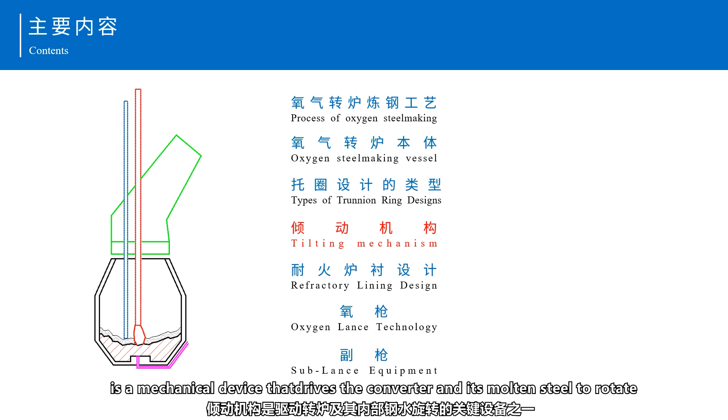Everyone, today I will introduce the tilting mechanism. The tilting mechanism of a converter is a mechanical device that drives the converter and its molten steel to rotate.

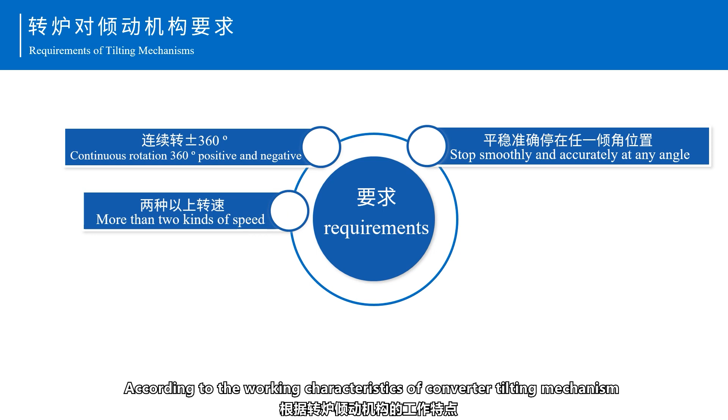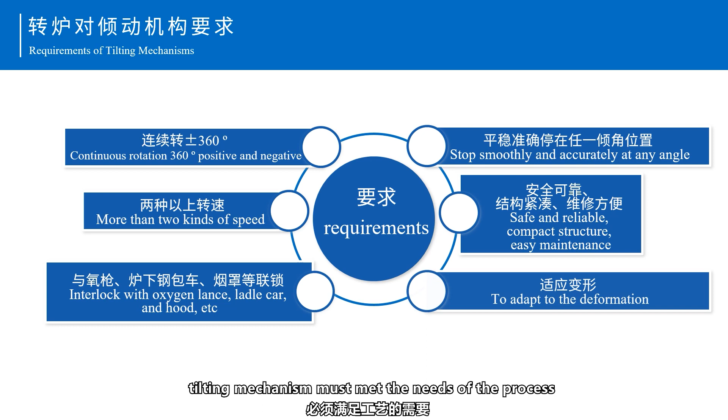According to the working characteristics of converter tilting mechanism and the need of operation technology, the tilting mechanism should meet the following requirements. First, in the whole production process, the tilting mechanism must meet the needs of the process.

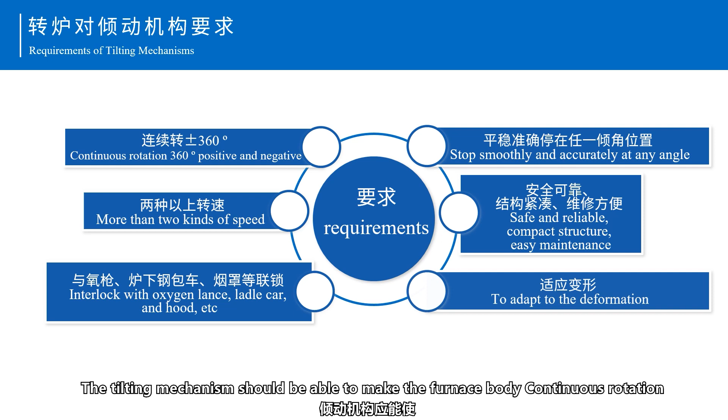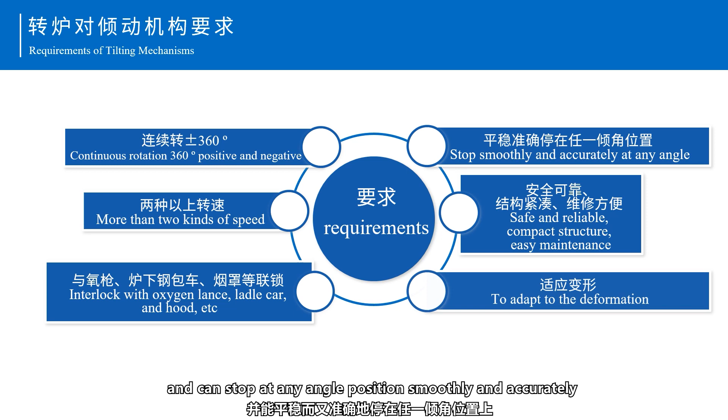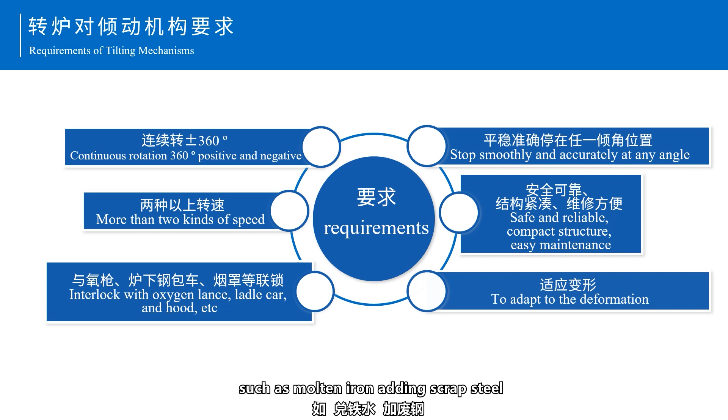The tilting mechanism should be able to make the furnace body continuously rotate for positive and negative 360 degrees and can stop at any angle position smoothly and accurately, so as to meet the requirements of various technological operations, such as molten iron, adding scrap steel, sampling, temperature measurement, steel drawing, pouring, and furnace repairing.

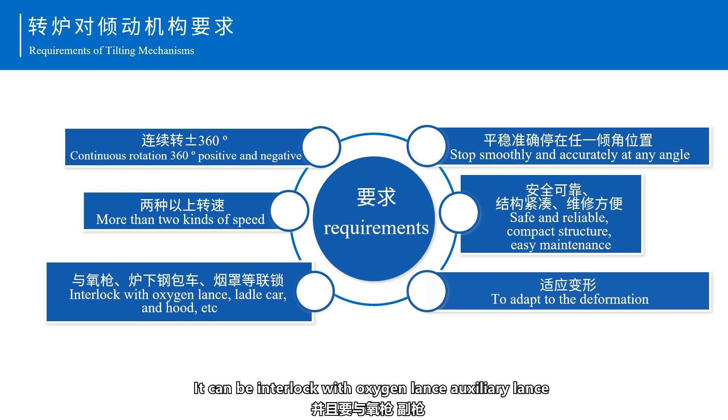It can be interlocked with oxygen lance, auxiliary lance, ladle car, smoke hood, and other equipment.

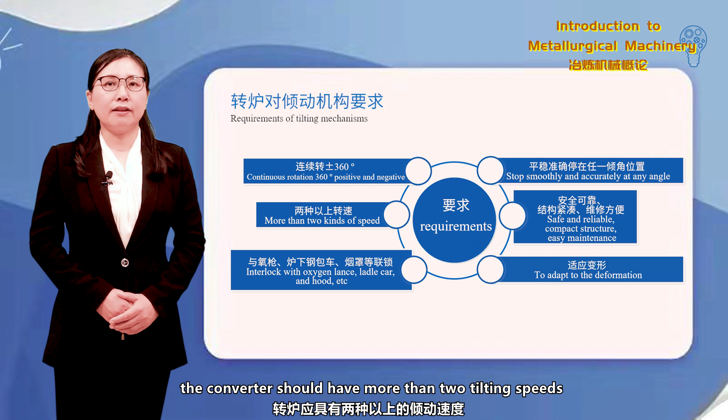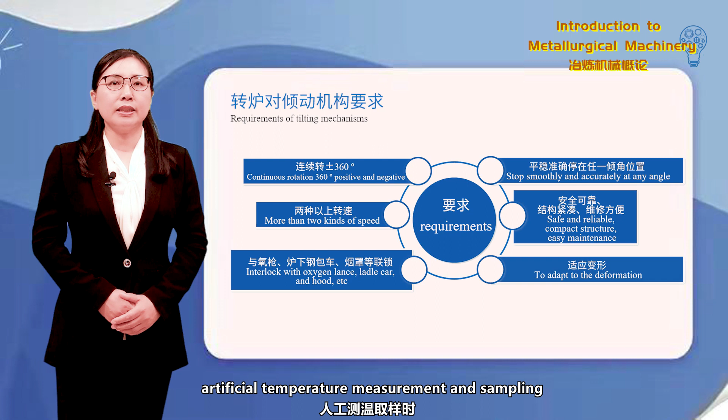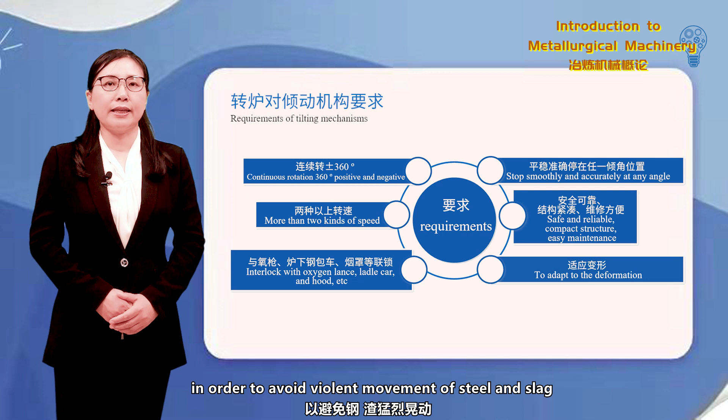Second, according to the requirements of the blowing process, the converter should have more than 2 tilting speeds. During steel tapping, slag pour out, artificial temperature measurement, and sampling, the BOF should tilt slowly and smoothly in order to avoid violent movement of steel and slag, or even splash out the mouth of furnace.

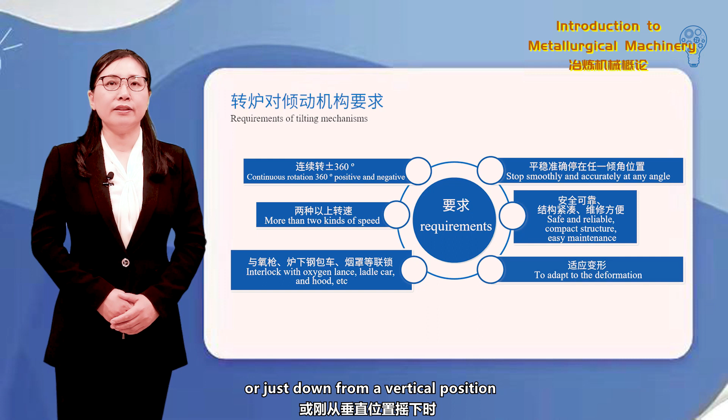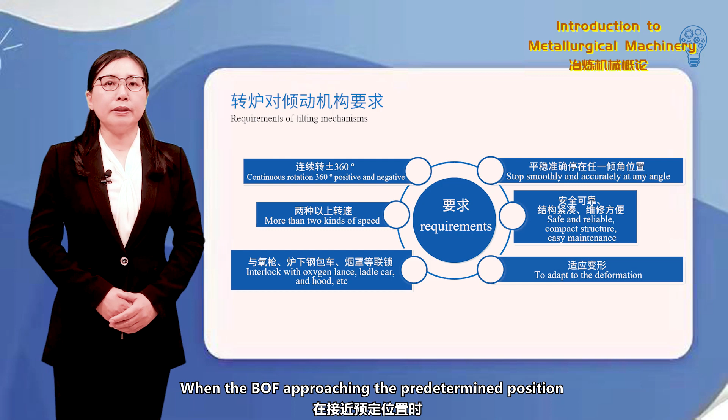When the converter is empty or shaken straight from a horizontal position or just down from a vertical position, a higher tilt speed can be used to reduce auxiliary time. When the BOF approaches the predetermined position, low-speed tilting is used to make the stop position accurate and make the furnace liquid stable.

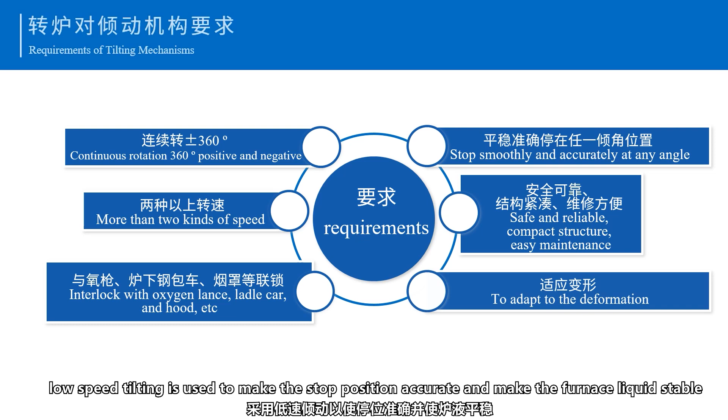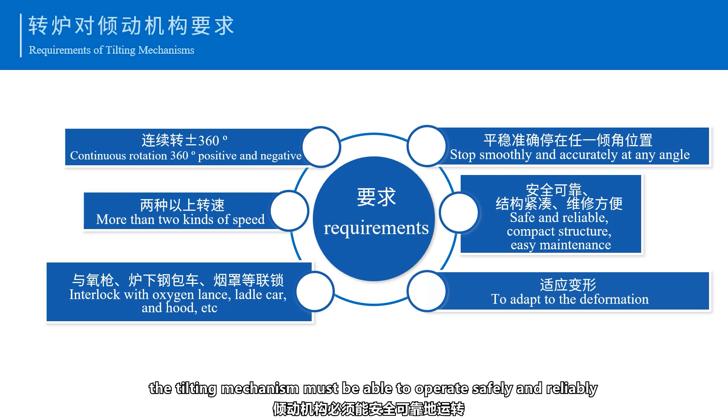Third, in the process of production, the tilting mechanism must be able to operate safely and reliably. Motor, gear, shaft, brake, and other equipment accidents shouldn't occur. Even if some equipment breaks down, there should be spare capacity to continue to work till the end of this furnace of steel.

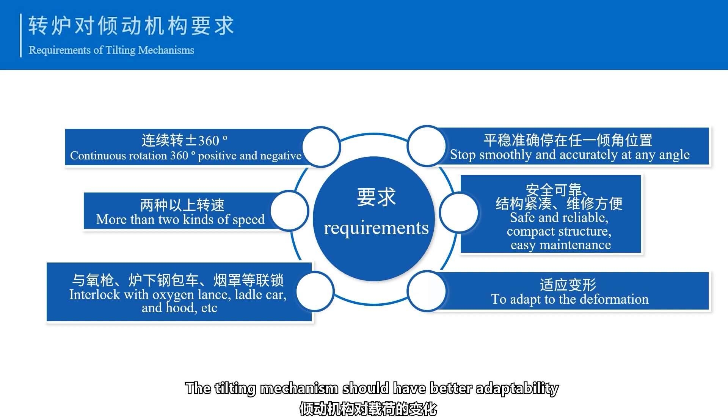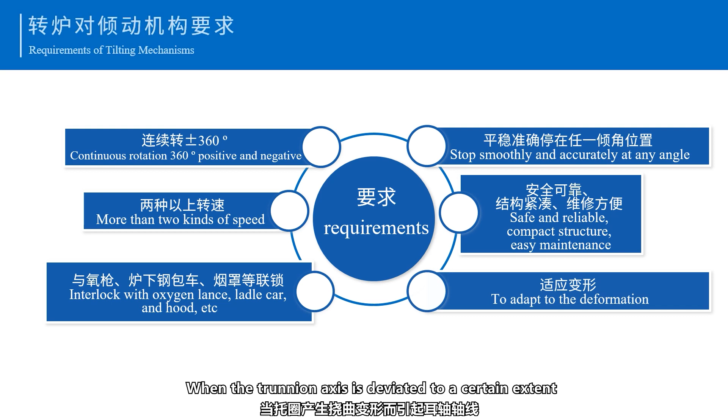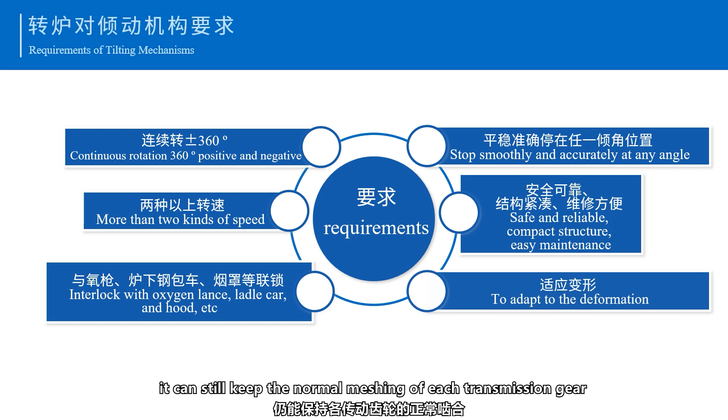Fourth, the tilting mechanism should have better adaptability to the change of load and the deformation of structure. When the trunnion axis is deviated to a certain extent due to the deflection of the bracket ring, it can still keep the normal meshing of each transmission gear, and at the same time, it should also have the performance of slowing down dynamic load and impact load.

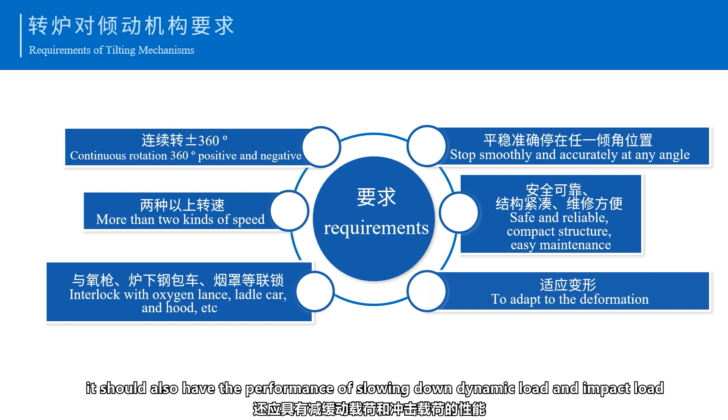Fifth, the structure of the tilting mechanism should be compact, lightweight, have high mechanical efficiency, and be easy to install and maintain.

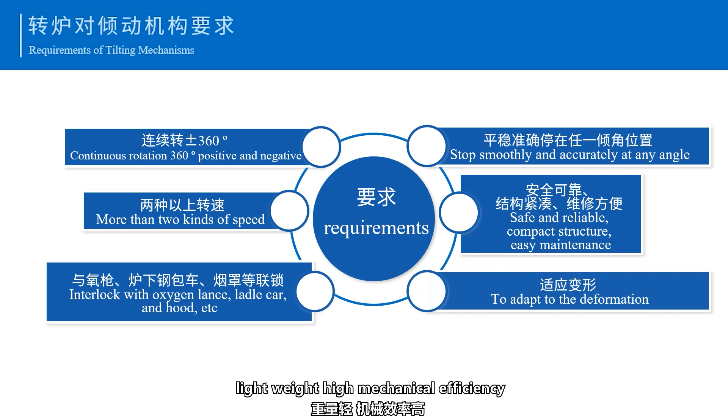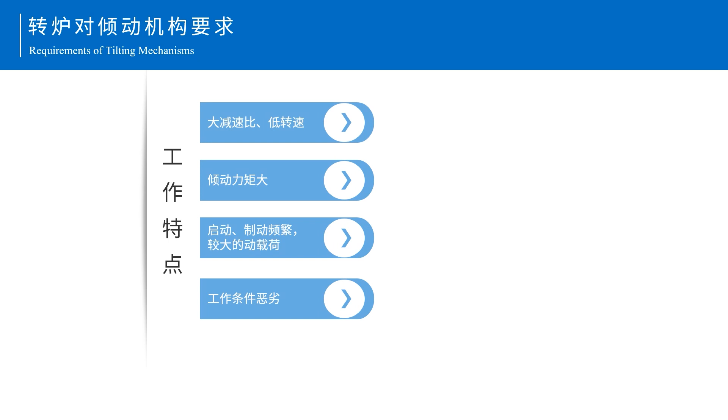There are many working characteristics of converter tilting mechanism. First, a large deceleration ratio. The working object of converter is a high temperature liquid metal.

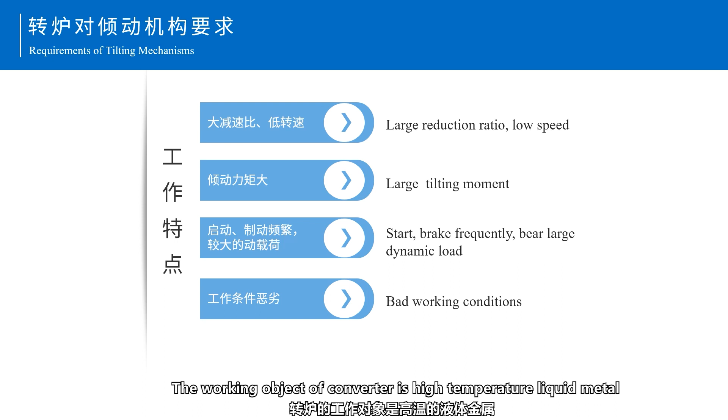There are a number of operations, such as steel tapping and adding molten iron. Therefore, the furnace takes a very low tilting speed, generally 0.1 to 1.5 revolutions per minute. To do this, the tilting mechanism must have a high deceleration ratio, usually 700 to 1000 or even thousands.

Second, the tilting moment is large. The weight of the converter body is very large, and the weight of the whole tilting part reaches hundreds or thousands of tons.

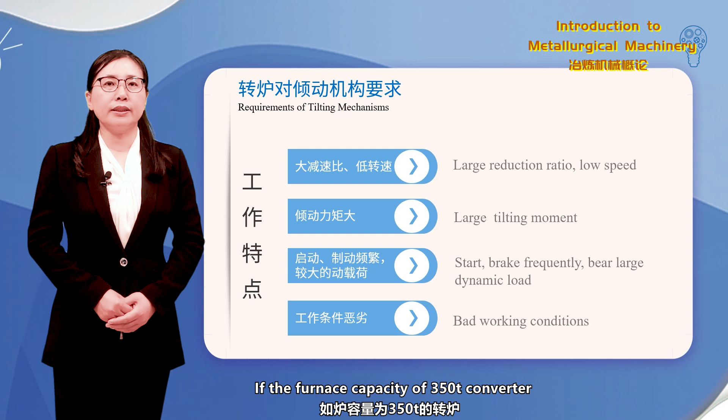If the capacity of the furnace is a 350 ton converter, its total weight is more than 1,450 tons. A great tilting moment is needed to tilt a converter of this weight.

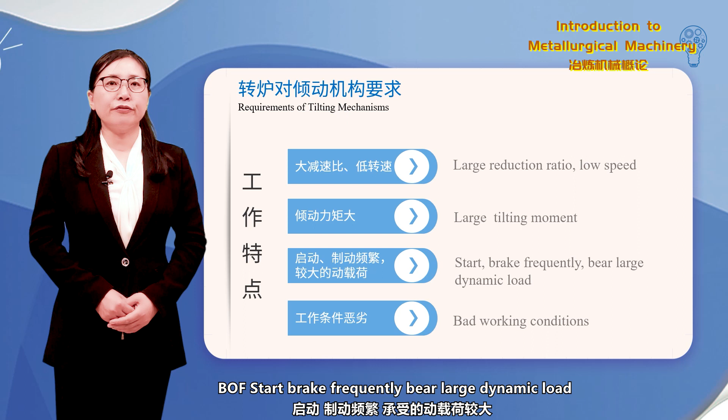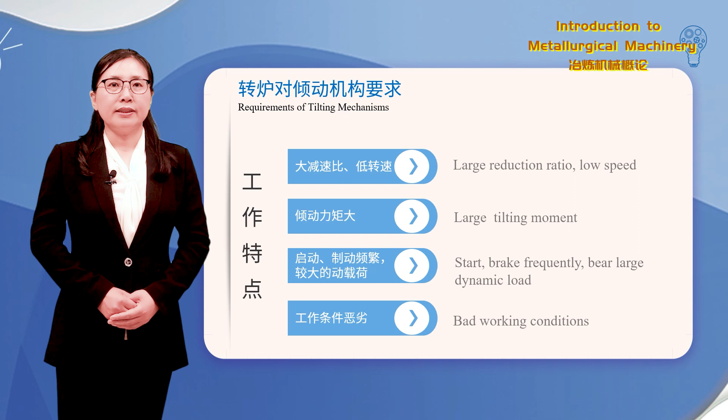Third, the BOF starts and brakes frequently with large dynamic load. The shortest smelting cycle of the converter is about 14 minutes. In this smelting cycle, a series of operations, such as adding scrap, adding molten iron, sampling, temperature measurement, steel tapping, slag pour out, and furnace repair, are involved in the starting and braking of the converter.

If the content of silicon and phosphorus in raw materials is high, the number of slag pour outs increases in the process of blowing, and the starting and braking operation is more frequent. In addition, the tilting mechanism not only bears the basic static load, but also bears the dynamic load caused by starting and braking. The dynamic load is more than twice the static load in the scraping operation.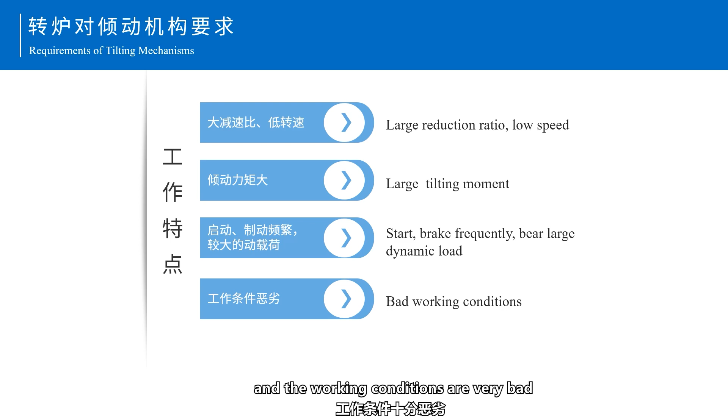Tilting mechanism works in the environment of high temperature and slag dust, and the working conditions are very bad. With the development of oxygen converter steelmaking production, the tilting mechanism has been constantly developed and improved, and various types of tilting mechanism have appeared.

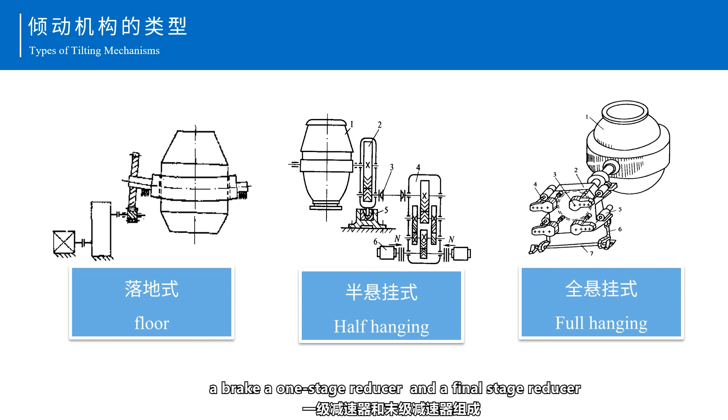The tilting mechanism is generally composed of a motor, a brake, a one-stage reducer, and a final stage reducer.

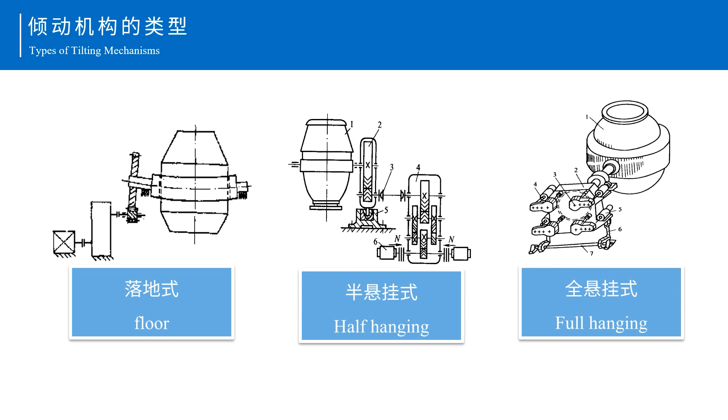The installation position of the transmission equipment is divided into floor type, semi-suspension type, full suspension type, and hydraulic type. Floor tilting mechanism means that the converter trunnion is equipped with a big gear, and all other transmission parts are installed on another foundation.

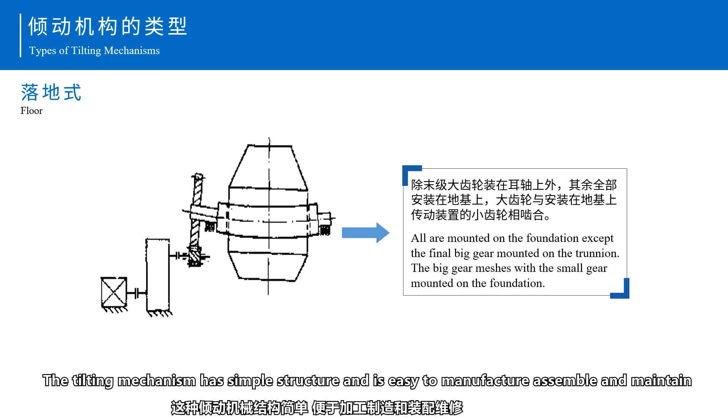The tilting mechanism has simple structure and is easy to manufacture, assemble, and maintain. When the trunnion bearing is worn, the big gear sinks or the trunnion tips upward due to the deformation of the bracket ring. The normal transmission of the big and small gears will then be impossible.

In addition, the big gear is an open gear, so sand easily falls in. Wear is serious, and life is short.

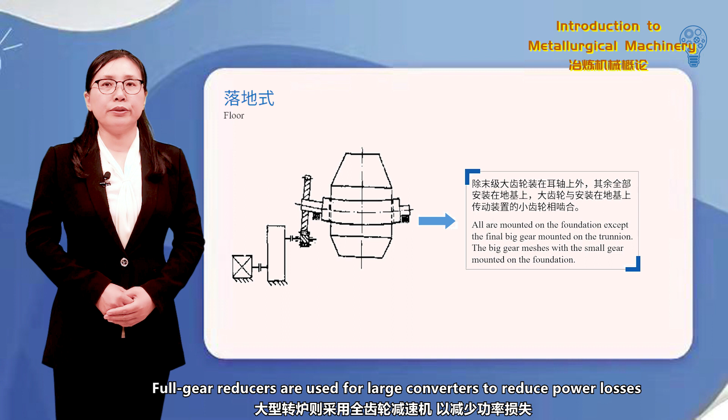Full gear reducers are used for large converters to reduce power losses. In order to overcome the disadvantage of fast wear of the low-speed open gear, the open gear is put into the box and becomes the main reducer.

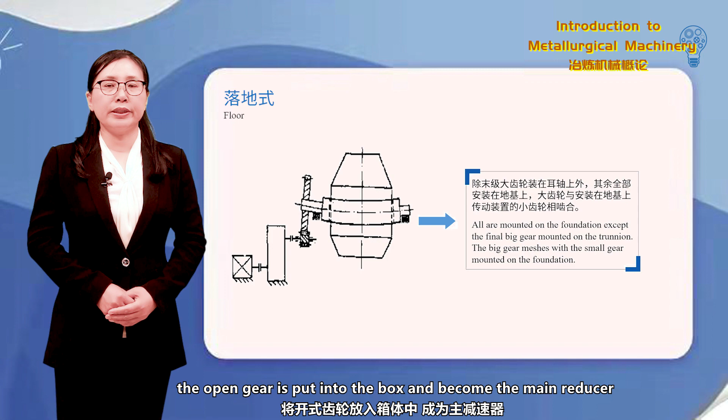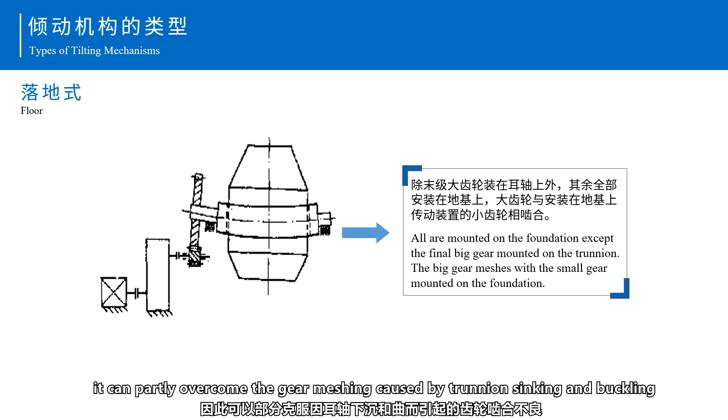The reducer is installed on the foundation. The main gear shaft and the trunnion are connected by a tooth coupling, because the tooth coupling allows a certain angle and displacement deviation between the two shafts. It can partly overcome gear meshing caused by trunnion sinking and buckling.

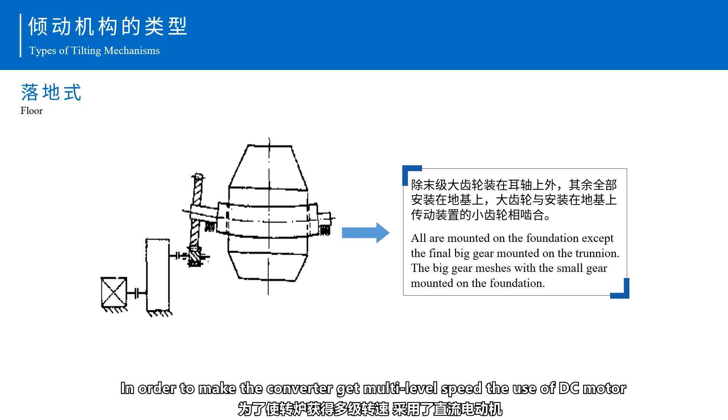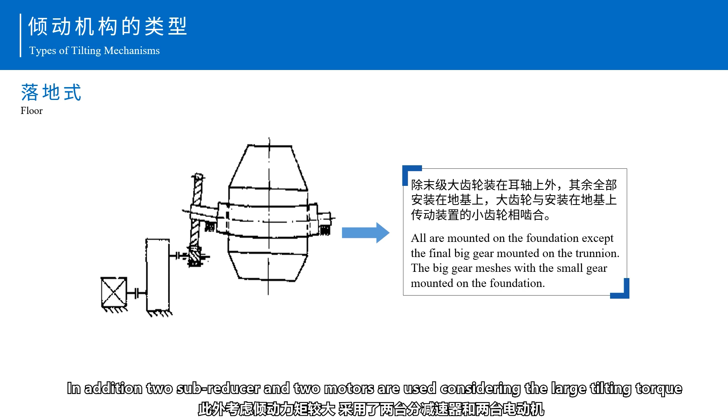In order to make the converter get multi-level speed, a DC motor is used. In addition, two sub-reducers and two motors are used, considering the large tilting torque.

Semi-suspended tilting mechanism is equipped with a suspension reducer on the trunnion of the converter; motors, other reducers, and so on are installed on another foundation. The pinion of the suspension reducer is connected with the floor reducer through a universal coupling or toothed coupling.

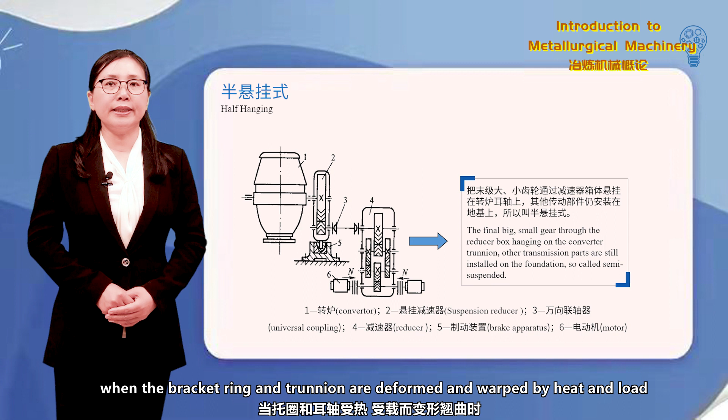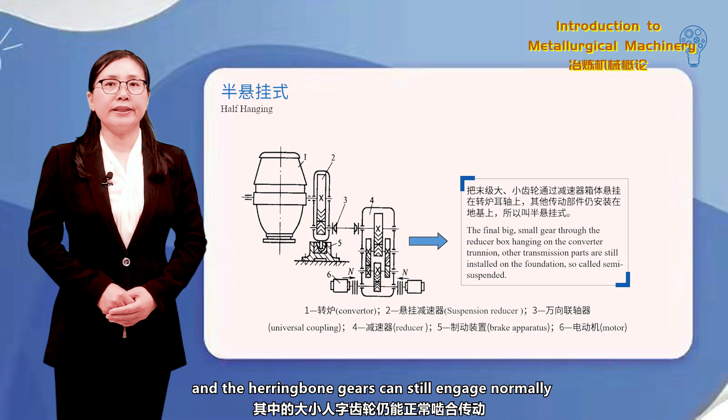In this structure, when the bracket ring and the trunnion are deformed and warped by heat and load, the suspension reducer displaces accordingly, and the herringbone gears can still engage normally. So the shortcomings of the floor tilting mechanism are eliminated.

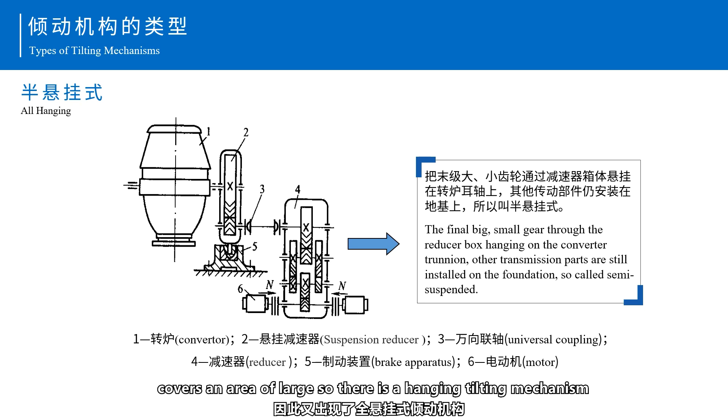In the semi-suspended tilting mechanism, the equipment is still very heavy and covers a large area, so there is the full suspension tilting mechanism. This mechanism suspends the big gear of the secondary reducer of the converter transmission on the trunnion of the converter.

The motor, the brake, and the first level reducer are mounted on the box of the suspension gear. This kind of mechanism generally adopts multi-point meshing transmission with multiple motors and multiple primary reducers.

In addition, it's equipped with an anti-torsion device to prevent box rotation and slowdown, which allows the converter to start, brake, and change speed smoothly.

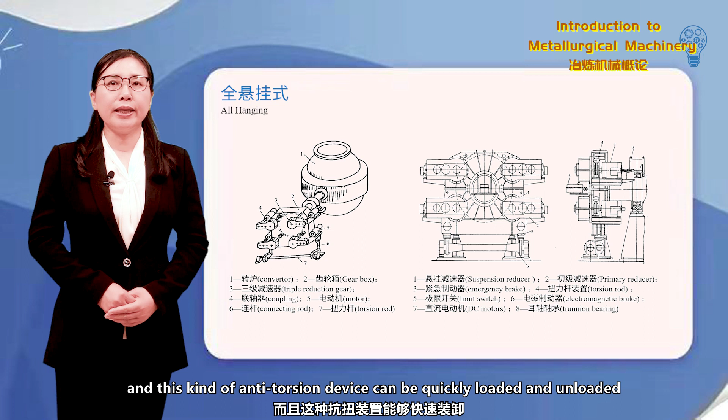And this kind of anti-torsion device can be quickly loaded and unloaded to meet the needs of maintenance.

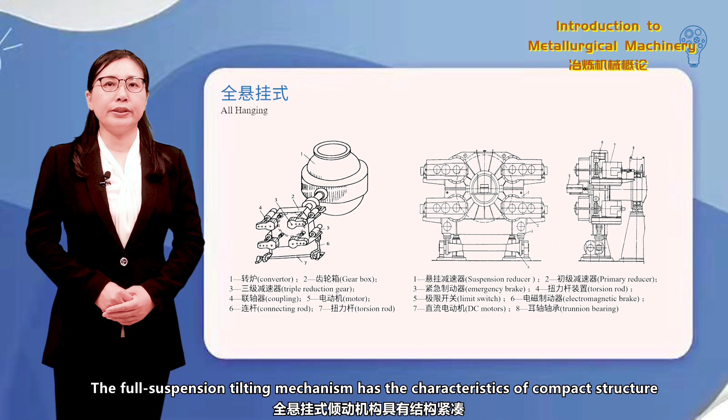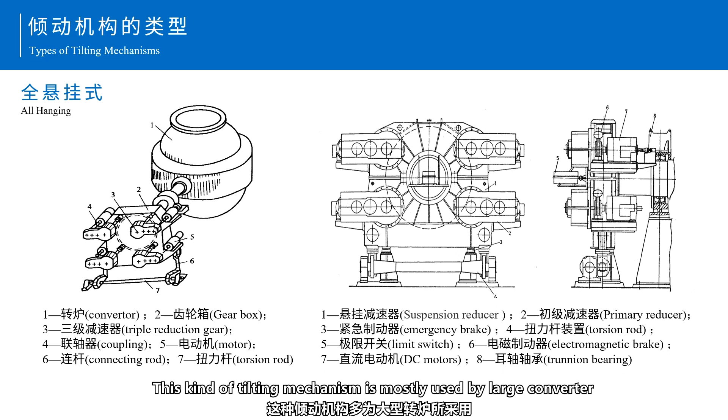The full suspension tilting mechanism has the characteristics of compact structure, light weight, small occupation area, safe and reliable operation, and good working performance. But because of the increase of the meshing points, the processing, adjustment, and bearing quality requirements are higher. This kind of tilting mechanism is mostly used by large converters.

At present, some advanced BOF have adopted hydraulic driving tilting mechanisms. Hydraulic transmissions are suitable for low-speed, heavy-duty occasions, and are not afraid of overload and blocking. Therefore, hydraulic transmission has strong applicability to the tilting mechanism of the converter.

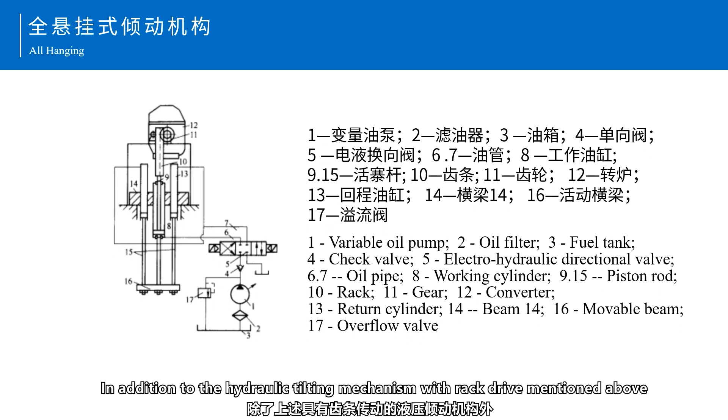In addition to the hydraulic tilting mechanism with rack-driven design mentioned above, a hydraulic motor can also be used to tilt the converter. That's all for today.